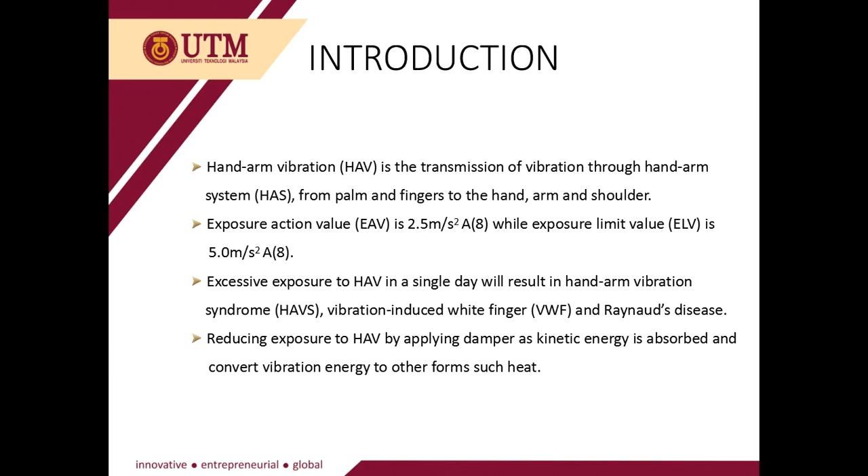However, there are a few ways to manage this problem and make it less risky, like reducing exposure to HAV and improving the productivity and quality of equipment. Thus, applying a damper when using a vibrating tool can reduce vibration effectively and practically, as kinetic energy is absorbed and vibration energy is converted to other forms such as heat. This study is significant as the risk of getting health problems can also be reduced.

The objectives of this research are to identify the hand-arm vibration magnitude on a hand drill machine, to reduce the exposure value for hand-arm vibration on a hand drill machine, and to evaluate and determine the damper with optimal performance in reducing vibration magnitude.

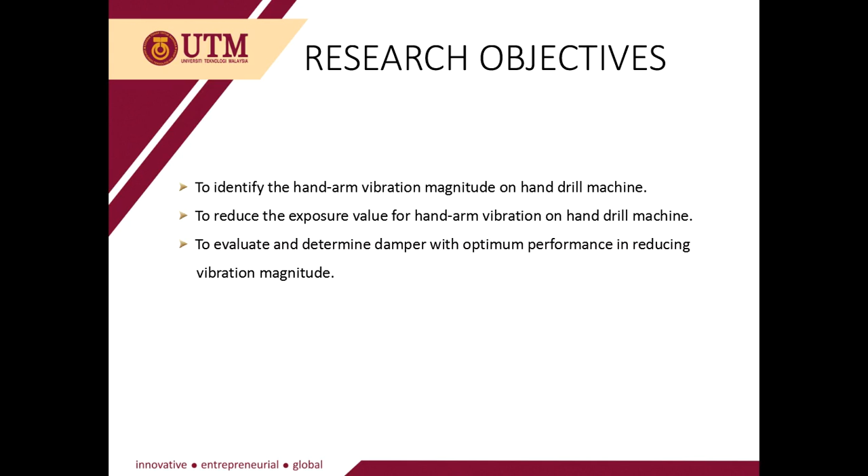The scope of this research focuses on hand-arm vibration on a hand drill in an idling state to avoid resonance. This is because the vibration of a machine is best measured during idle instead of when drilling on any workpiece. The experiments are carried out over a 3-minute period and repeated 7 times. There are 5 types of dampers used in this study to reduce the vibration magnitude of the hand drill.

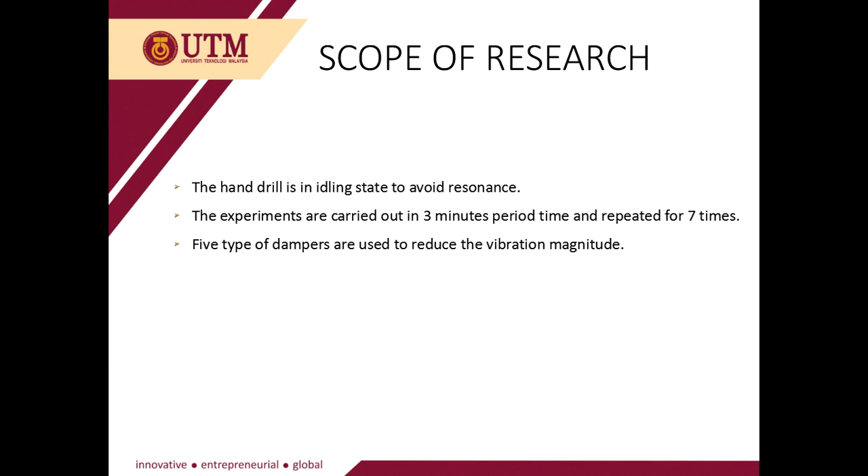Next, methodology. This is the workflow for this research. Firstly, the specimen of the experiment needs to be identified. In this case, it is a hand drill. Before starting the experiment, calibration of the apparatus is needed to ensure readings from the instruments used are consistent with other measurements, and also to determine the accuracy and reliability of the instrument. After that, the experiment is set up properly to ensure it runs smoothly.

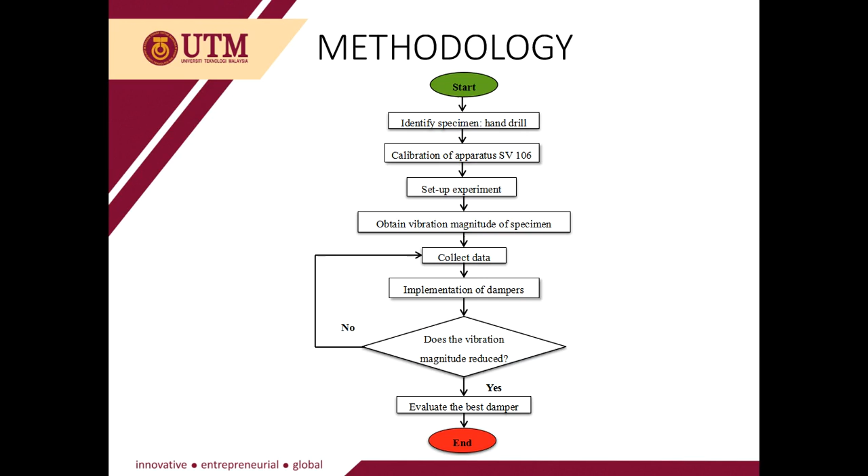Next, the experiment is conducted without a damper first to get the reading of the vibration magnitude of the hand drill. Then, the rest of the data is collected using dampers to reduce the vibration. Once the experiment is done, the results need to be evaluated for whether there is a difference in the vibration reading or not. If the vibration reading decreases when a damper is applied, then the experiment succeeds since hand-arm vibration on the specimen is reduced. However, if there is no difference in vibration magnitude, the experiment needs to be repeated from collecting data. After all the experiments have been carried out, the best damper can be evaluated.

In my research, I am using Kando Powerhouse Professional Impact Drill. The corded drill is chosen instead of cordless drill because the power produced tends to give more vibration. The specimen needs to be originally higher in vibration amplitude before damper is applied to compare the difference in the readings at the end of the experiment.

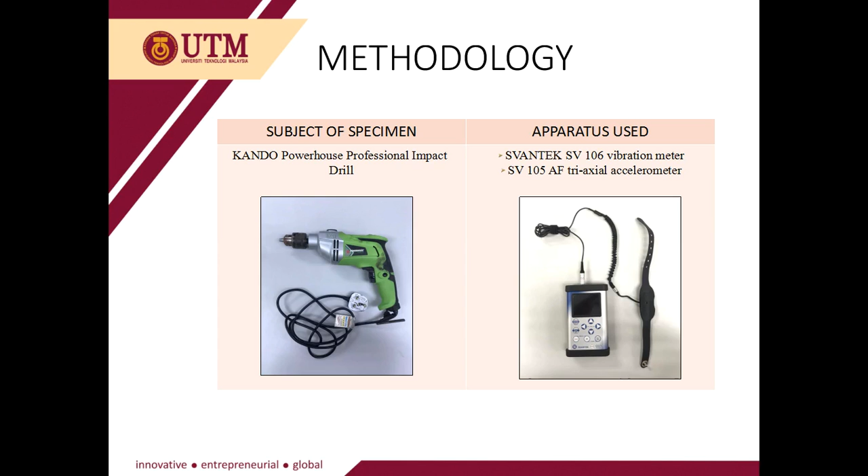The magnitude vibration reading of subject is taken using vibration meter SV106 and triaxial accelerometer SV105. The figure shows the schematic diagram and the actual diagram of experimental setup. The vibration meter is connected to accelerometer using connecting wire, and the accelerometer is attached to the hand's palm.

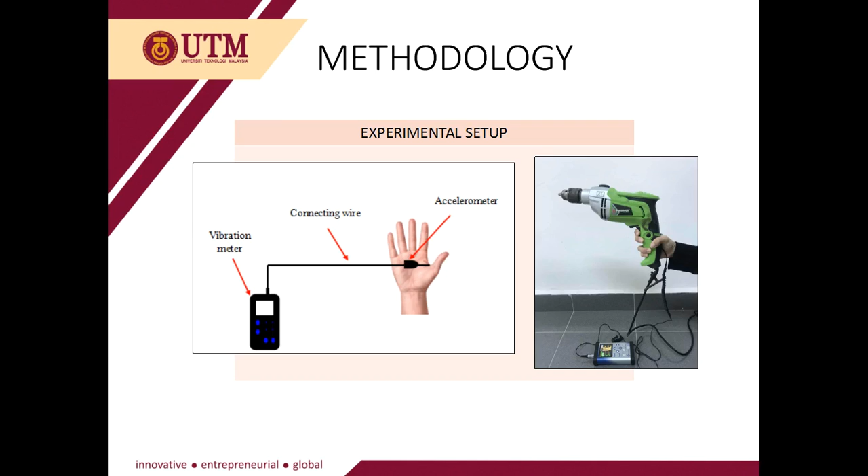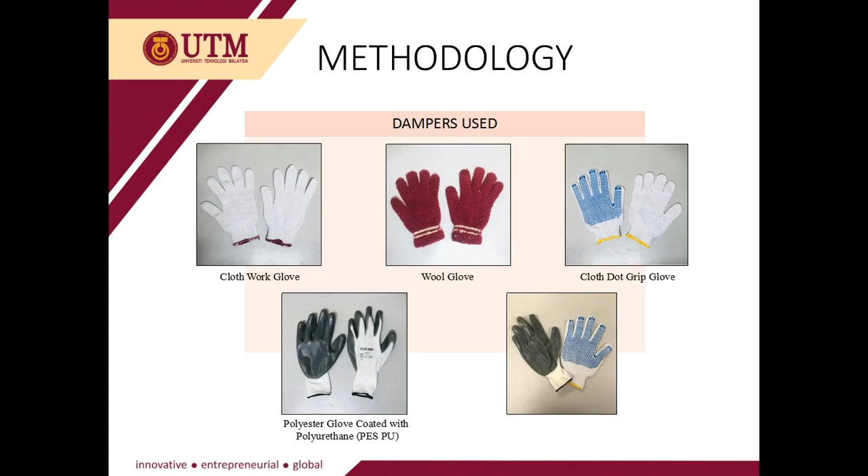The dampers used in this research are in form of gloves with different kinds of materials and properties. There are cloth glove, wool glove, cloth dot grip glove, polyester glove coated with polyurethane, and the combination of cloth dot grip glove and polyester glove coated with polyurethane.

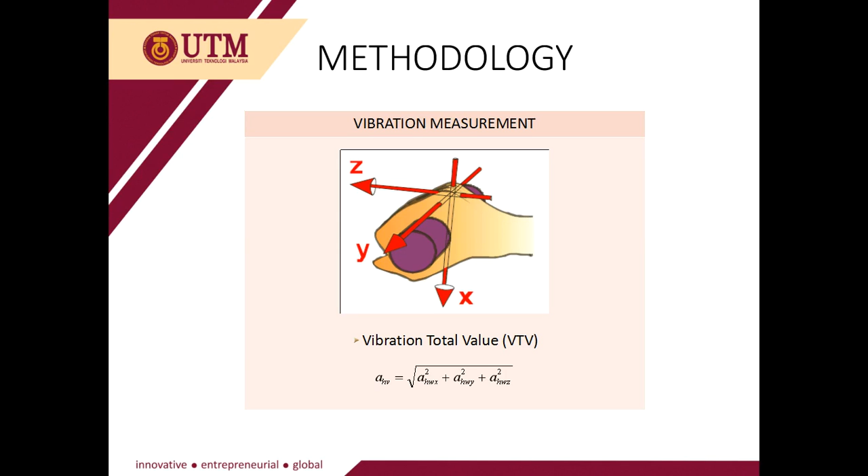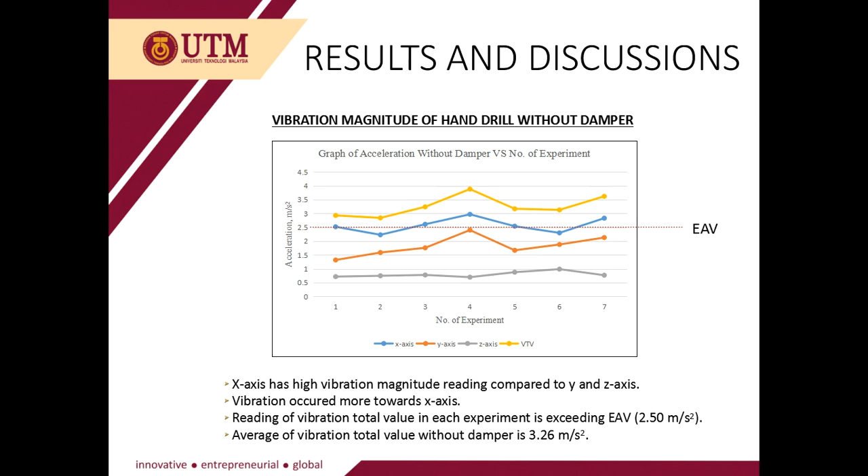The average of vibration magnitude reading of hand drill without any damping gives 3.26 meter per second squared. Even though the average vibration total value has not exceeded the standardized ELV, it has exceeded the EAV, which indicates a state that is approaching the exposure limit. Therefore, there is a need to curb this problem so the user is not inflicted by HAVS in the future.

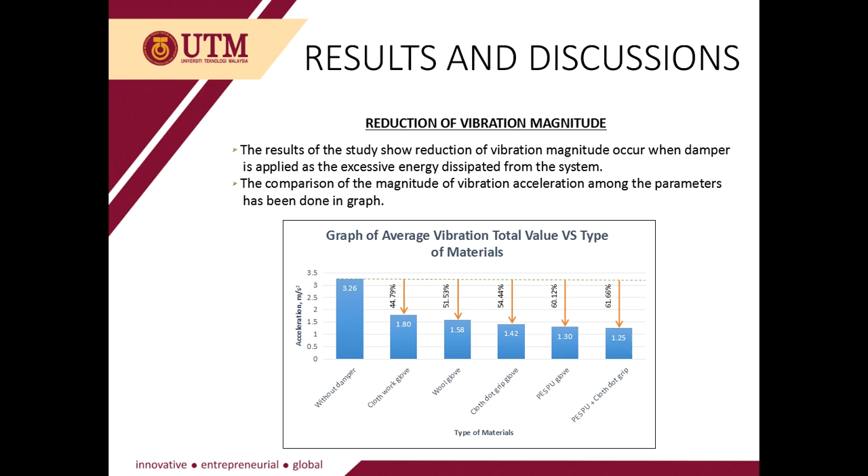As conclusion, from the research, the hand-arm vibration magnitude value on hand drill without the presence of damper was identified using vibration meter and accelerometer and gives value of 3.26 meter per second squared. The exposure values for hand-arm vibration on hand drill was successfully reduced by applying damper on the tool, and each damper shows reduction value in the experiment.

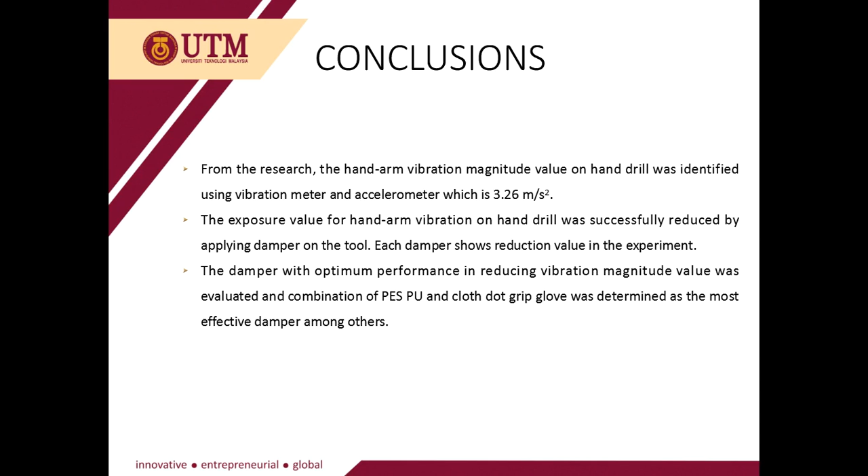The damper with optimum performance in reducing vibration magnitude value was evaluated, and combination of PESPU and cloth dot grip glove was determined as the most effective damper among others, with reduction percentage of 61.66%.